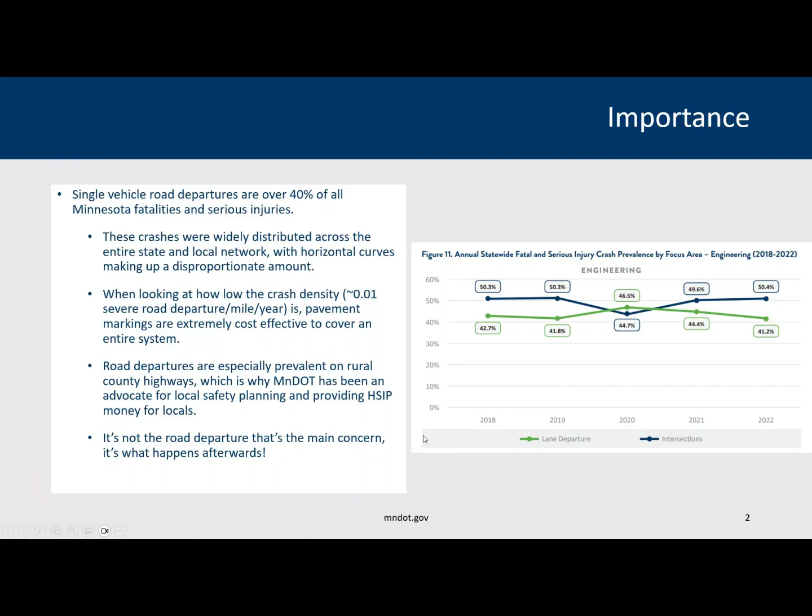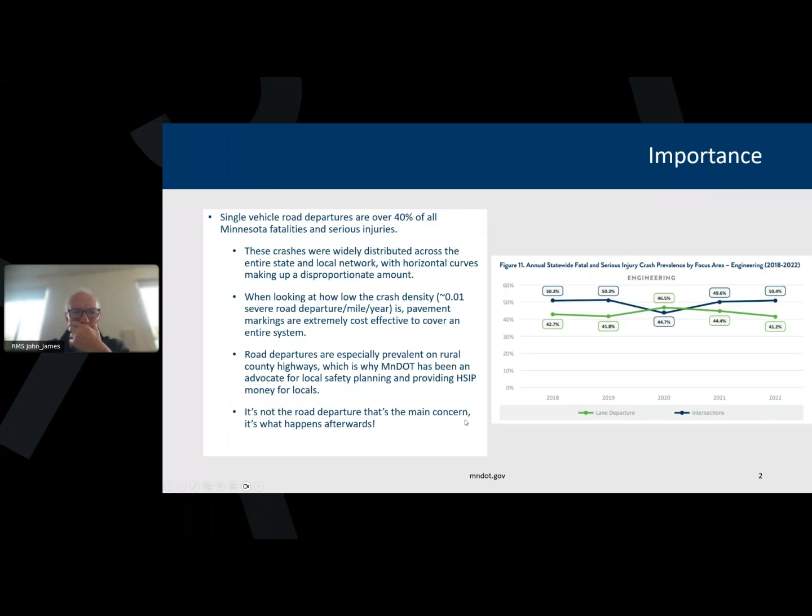And roadway departures are particularly prevalent on rural county highways, as most of us probably know. And it's really not the road departure that we're worried about, right? It's what happens afterwards that can be devastating. Okay, when are pavement markings needed, right? This is kind of starting out at the simple side of things. I think we all know this.

Centerline markings shall be placed, according to the MUTCD, on all paved urban arterials and collectors that have a traveled way of 20 feet or more in width and an average daily traffic of 6,000 or greater, and two-way streets or highways that have three or more lanes for moving motor vehicle traffic. Edgeline markings shall be placed on paved streets or highways with the following characteristics: freeways, expressways, rural arterials with 20 feet or more and ADT greater.

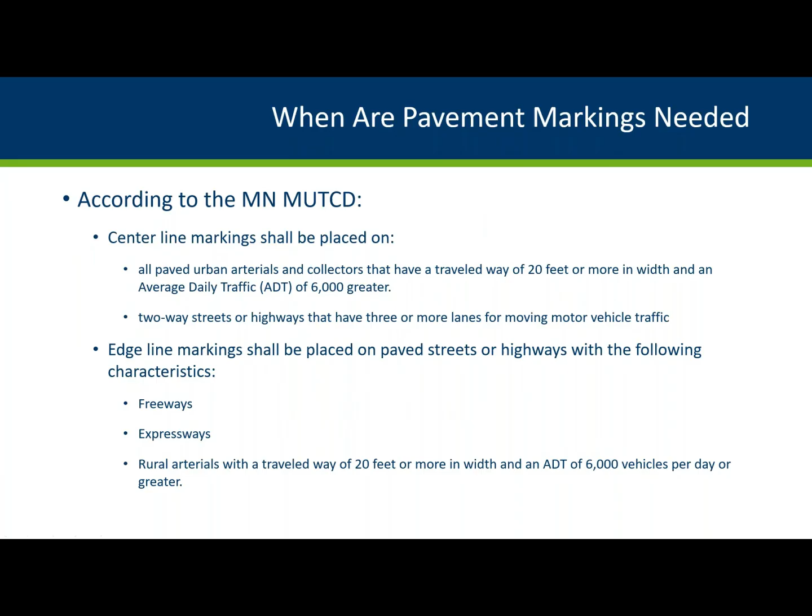Really just saying that because due to safety benefits, MnDOT actually has chosen to install center lines and edge lines on all of our paved roadways. Granted, we probably have higher ADTs than a good chunk of our state, counties, and cities, but this is our decision that we've made. And in our MnDOT provisions for pavement marking operations tech memo, we do state that we want to provide an appropriate pavement marking on all highways 365 days of the year. And an appropriate pavement marking is one that meets or exceeds the standards defined in the MN MUTCD. We do make our own MUTCD, just a caveat there.

And then obviously winter, right? During winter weather events, pavement markings should provide presence after pavement is clear of snow and ice. So just kind of giving that caveat because we do have to clear that quite a bit. I'll just gloss over this.

Research shows, like in that tech memo, we kind of talk about how we fell on our minimum retros, and looking through that and the research there, MnDOT's adopted a minimum performance of 100 millicandela per meter squared per lux for both white and yellow, minimum in service. And as markings approach this threshold, they have to be replaced. And one of the tools that we use that we verified to kind of figure out when we look at these markings is coming up. And minimum initials have been set to get the desired longevity.

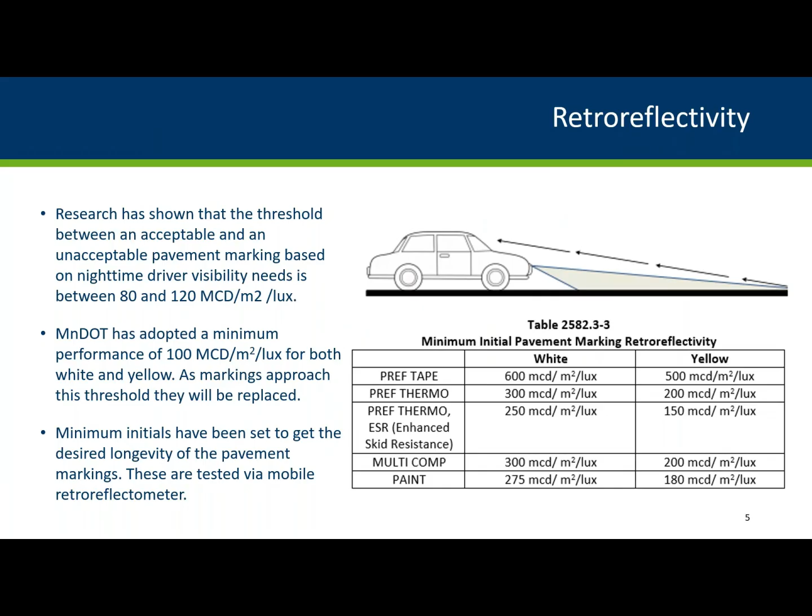That kind of leads into this next slide: how long do we anticipate these things to last? If you look at this chart, obviously surface applied markings last less time than recess markings, which is why we're really pushing for recess markings. We've verified that we're seeing multi-component liquids, or primarily slow dry epoxy, and in recesses we're seeing 5 to 7 years pretty regularly, which is great.

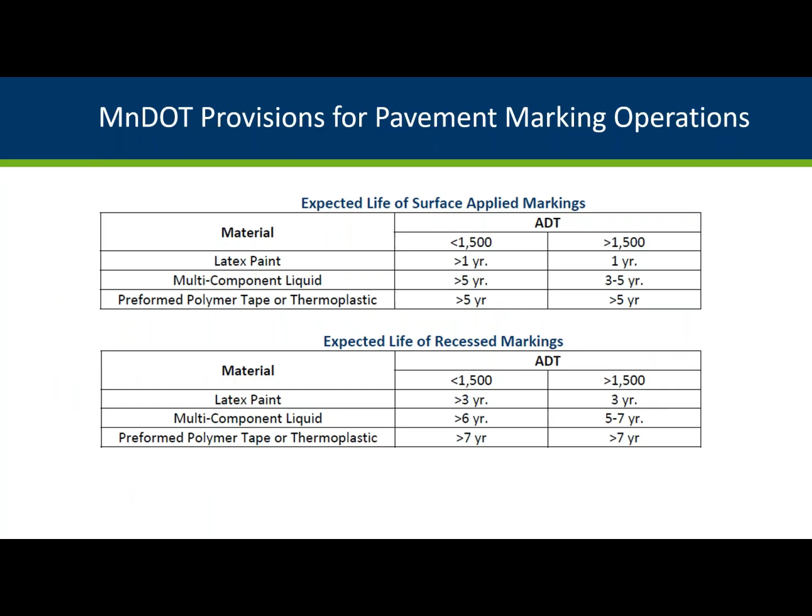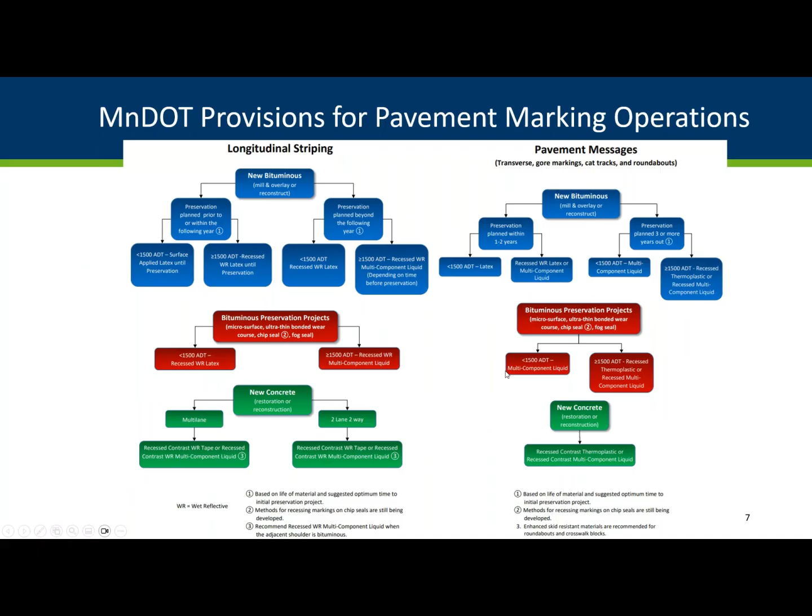This is a flow chart from that same tech memo. You can look at this further when it gets sent out, or through the recording, or screen capture it now. It's also in the provisions for pavement marking operations tech memo. As you can see, we're calling out a lot of recessed and wet reflective markings, and we'll get to why that is further along.

Recess markings, right? You can see this is a picture in my background - it's a beautiful picture in my opinion. A vast majority of new surface and preventative maintenance projects are calling for recess marking on MnDOT roadways. The reason is a significant increase in longevity due to wear, as you can see in that expected chart, giving quite a bit more lifespan.

And it reduces installation time. One of the big things too is that the less you have to install it, we're reducing installer exposure to traffic, which is a huge benefit. For life cycle cost, sometimes it looks equal when comparing costs now versus more frequent yearly latex applications. We're very conservative when we look at these prices, and in the long run, comparing a now cost versus a later cost, we're definitely cheaper on the life cycle costs.

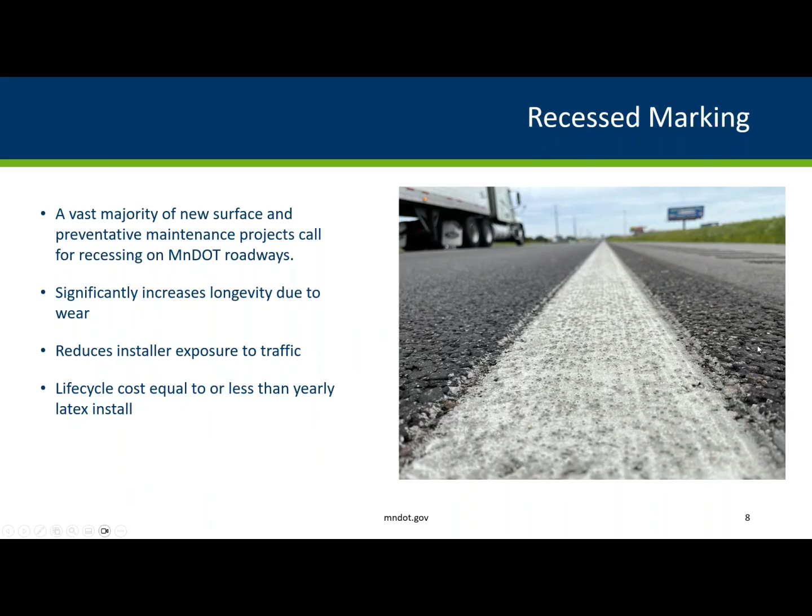One of the other things you may have noticed is that we're pushing enhanced skid resistance markings. It's a concern for vulnerable road users like motorcyclists, bicyclists, and pedestrians - we want to make sure these roadways are also safe for them. This is for messages mostly, and the enhanced skid resistant option with added aggregate is recommended for any situation where deceleration, turning movements, or pedestrian and bicycle traffic is occurring.

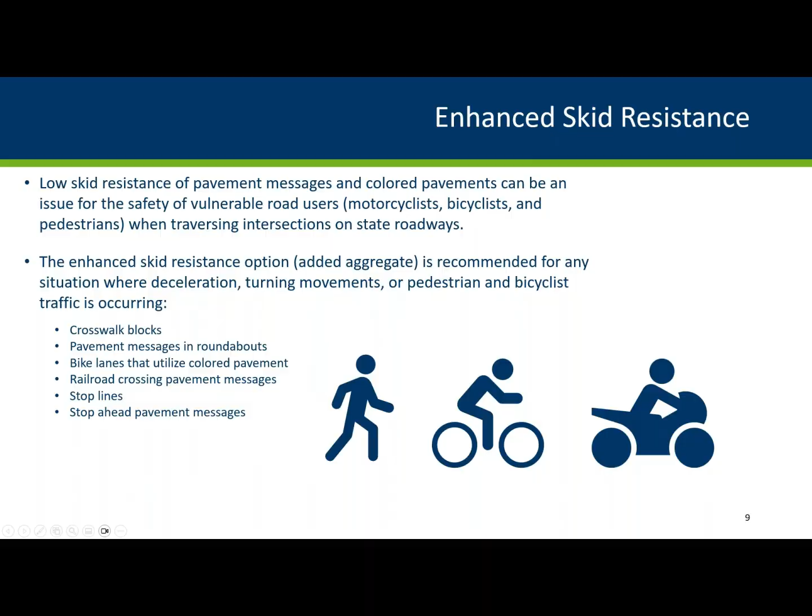Jumping into the wet reflective side of things that I noted earlier, we got to this pavement markings wet retroreflective standards research study. The reason is that we're recessing all our markings, and now when we see severe downpours or rain in general, we've created troughs that fill up, and we can't really see the markings that well. So what do we need for wet retroreflectivity? This is a situation we've created through the recess, but we wanted to solve through this research study.

We had been calling out wet reflective markings, whether recoverable or wet continuous elements, but this study was really drilling down into what the minimum needed to be. So laying out what this did: we did wet continuous condition testing, where participants counted skip markings visible in the 3M rain tunnel from a stationary position, two sets of markings at a time. You'll see some pictures that make this clearer as we go forward.

A previous picture was one as well, but we'll get there again. They'd count these skips, and that would be turned into an observation distance to make sure we got an appropriate observation distance through all this. Then we got subjective ratings of the marking adequacy from each participant.

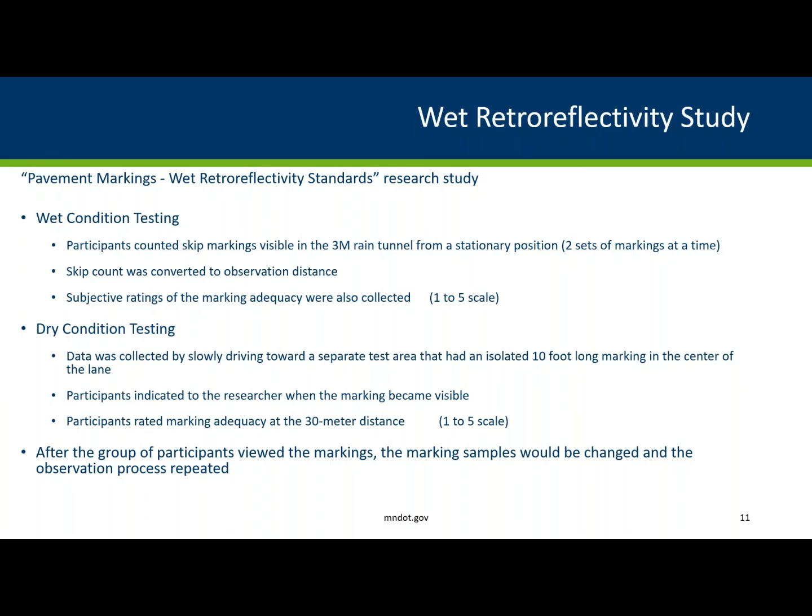We also did some dry condition testing, where as they drove through the tunnel they approached a 10-foot long marking. Participants would indicate when that marking became visible, and then rated that adequacy 1 through 5. After the group of participants viewed the markings, the marking samples would be changed, and they'd go through another round of this.

So the data overview—this is a really good picture comparing a couple of markings that were out in the rain tunnel as the water was going. There were 1,209 human factor observations: 403 dry, 162 at rain rate 1, with a higher and lower rainfall, the higher being 2.5 inches per hour and the lower 1.5 inches per hour. Those are still pretty high rain rates, especially knowing that ASTM 2832 for continuous wetting is 2 inches per hour—that's pretty significant. These two markings were simultaneously observed each trip. 20 marking samples were evaluated, 11 white and 9 yellow, and here are the retroreflectivity ranges.

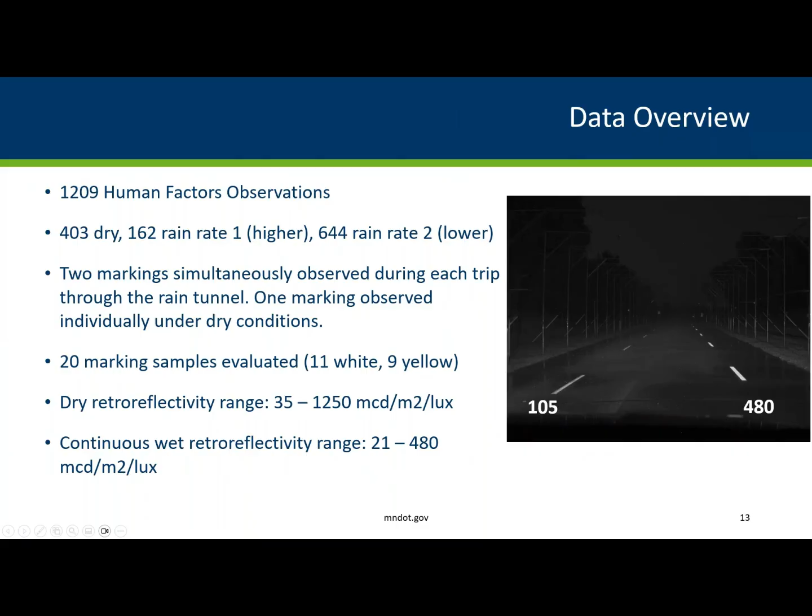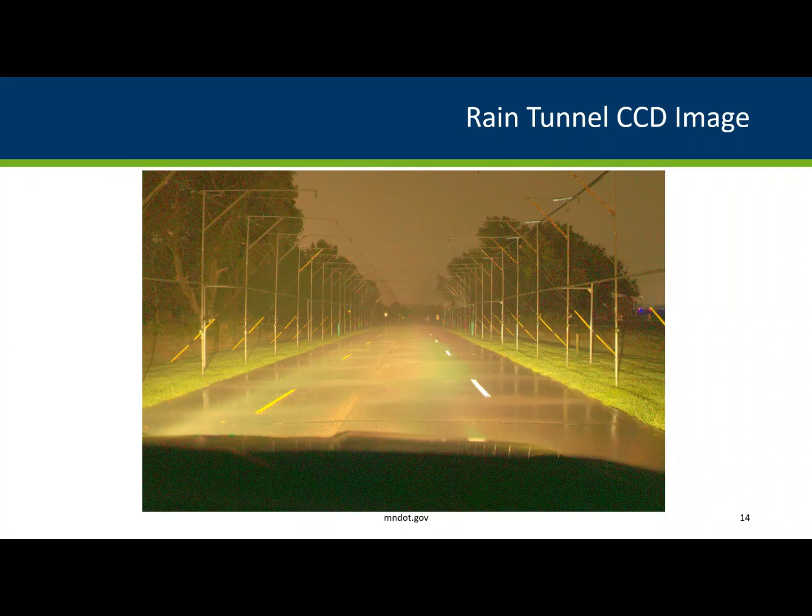Just another picture from the CCD image, which was taken with a ProMetric I29 imaging colorimeter, giving you a picture of what it looked like out there. And then just the dry marking as they approached it—this is what that marking would look like.

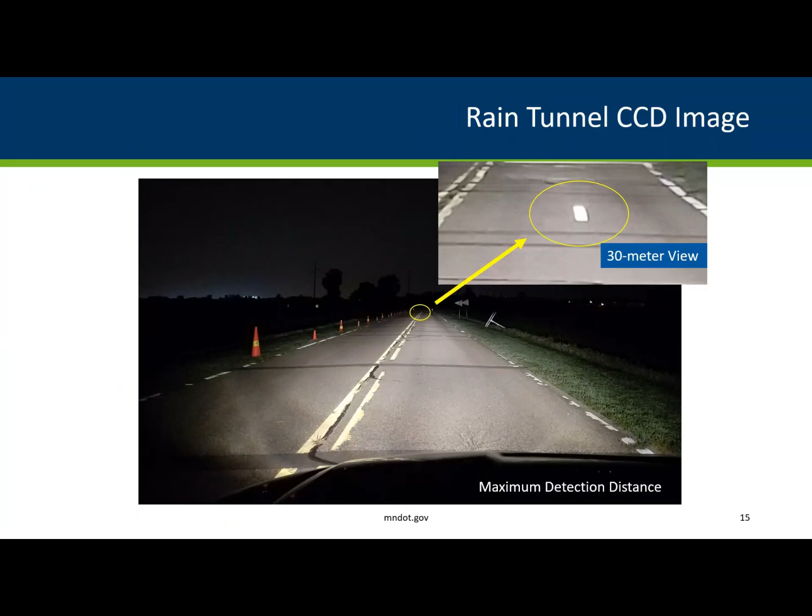So skipping to the end, what we found was that 50 millicandela per meter squared per lux wet continuous retroreflectivity was found to be the minimum to make an emergency maneuver at 55. So this is the bare minimum we wanted installed for wet retro. Looking through some numbers out there, there weren't a lot of numbers when this was done as far as degradation of wet elements really went. We had some, but from that we estimated that about 200 was the suggested initial install.

We're still working through that. I would say we're definitely going to be modifying where the yellow falls, just because yellow wet continuous values are pretty tough to get. We'll see where we end up, but it's definitely going to be less than that 200. We also have a special provision requiring initial testing on all our wet reflective markings out there, which can be done through our mobile retroreflectometer contractors in the state using ASTM 2832 or an approved equivalent—there is one approved equivalent they can run mobily.

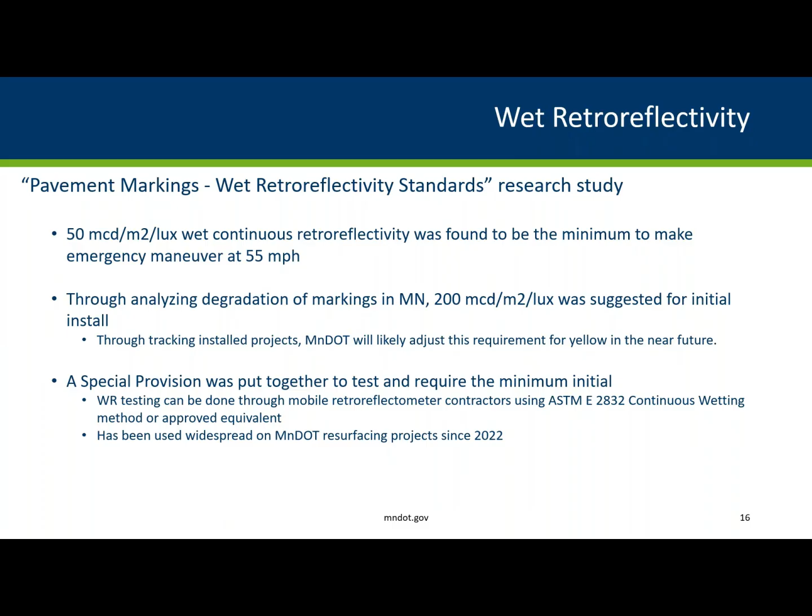This has been used widespread on MnDOT resurfacing projects since 2022. So we're getting some data, and we're also tracking the degradation as we go here too. We haven't reached the end of that, so that's good. Since 2022, we're still going—we still haven't reached that initial minimum, especially on our epoxy installs. So that's good to highlight.

And some other research studies here, just looking at some general safety indicators. There's a study, Safety Evaluation of Wet Reflective Pavement Markers, which looked at freeway sections in Minnesota, North Carolina, and Wisconsin, treated two-lane rural road locations in Minnesota, and treated multi-lane road sections in Wisconsin. As you can see, there were some pretty positive CMFs on freeways for all injury crash types—0.88, about a 12% crash reduction—and on freeways for wet night crashes, about 14%.

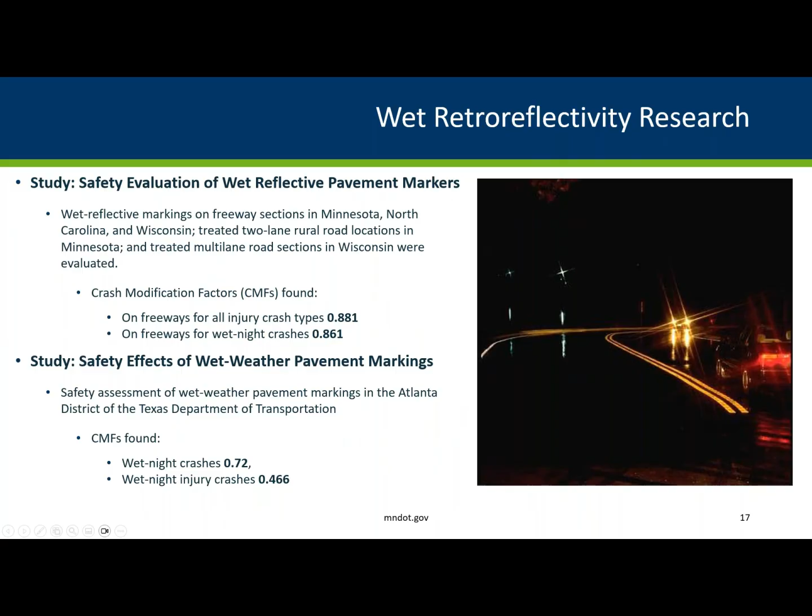There was another one, Safety Effects of Wet Weather Pavement Markings—a safety assessment of wet weather pavement markings in the Atlanta district of the Texas Department of Transportation. They had some pretty impressive findings there, with wet night crashes having a CMF of 0.72 and wet night injury crashes a CMF of 0.466. That is astounding. I wouldn't expect you to get that everywhere, but it's very impressive that they got that.

And this is just kind of a visual—a video from one of our 3M reps who is retired, but it's a great video to see the difference between it all. As you can see, this is all wet reflective markings, and then boom, non-wet reflective markings. So it's a very drastic difference visually, and it's always good to have that real world video to highlight how drastic the difference is.

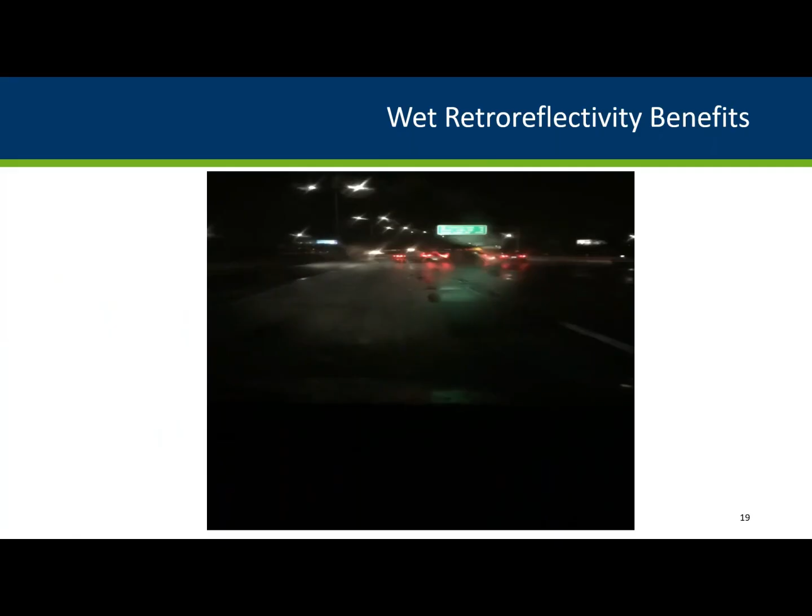Moving on, wider markings is another big issue, big topic that we've been pressing, and I'll go through what we've used to get wider markings here. There are a decent amount of safety cases for the 6-inch edge lines, and I believe Paul Carlson covered some of this, but I wanted to highlight all of these very impressive safety studies that went into driving the 6-inch edge lines for us.

Looking at the safety effects of wider edge lines on rural two-lane highways, highlighting what they looked at: there were 1,178 miles of 4-inch to 6-inch edge lines in Kansas, Michigan, which switched close to all their state roadways to 6-inch in 2004. Illinois had 1,446 miles of 4-inch to 5-inch edge lines.

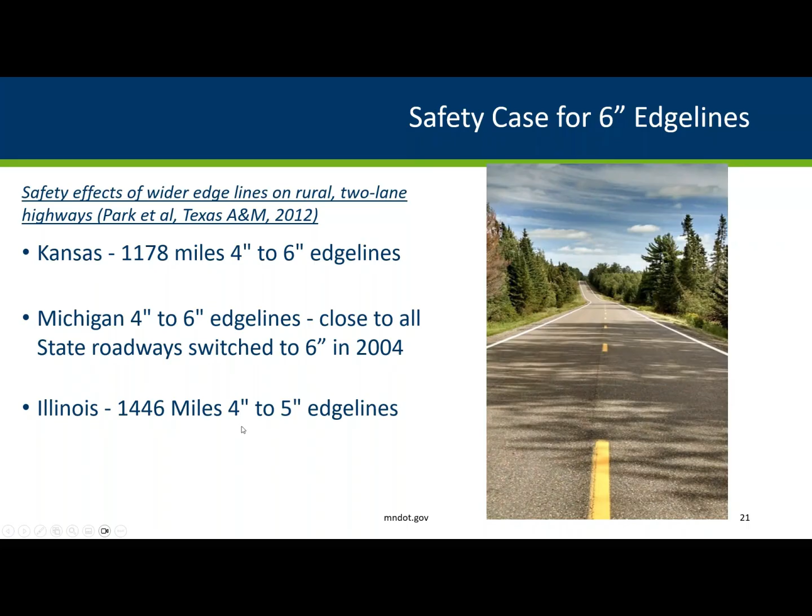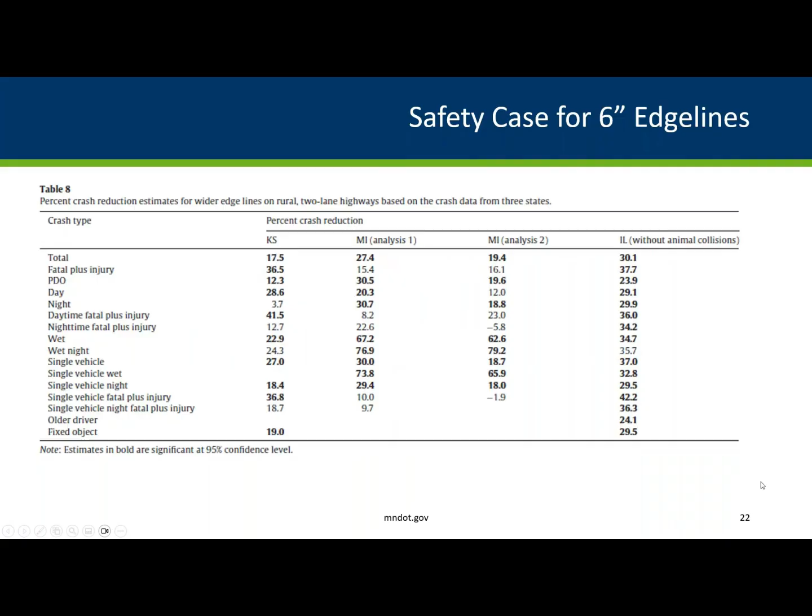And what did they find? They found pretty impressive crash reductions here as well. You can look through this, but I'll highlight some CMFs as we go forward. Benefit to cost is another big thing, as you can see in this last slide. There are very good crash reductions here.

This is another big study we looked at on the CMF website, the benefit to cost evaluation of Missouri DOT's total striping and delineation program phase 2. They had 2,300 miles of 6-inch all markings on their roadways, going from the 4-inch to the 6-inch, and then just looked at the benefit to cost they were getting.

Without resurfacing, on urban multi-lane divided highways they were seeing a benefit to cost of 29 to 1, and without resurfacing on rural freeways, 24 to 1. These are amazing benefit to costs - you rarely see these high numbers, which just highlights how big of an impact you can make with these wider pavement markings.

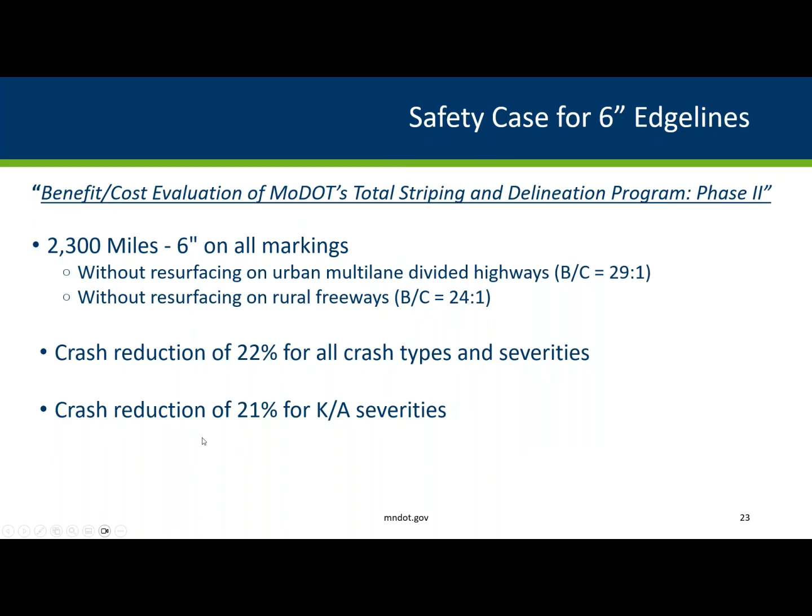Crash reduction at 22% for all crash types and severities, and 21% for K&A severities - also very impressive numbers. Another one: safety impacts of using wider pavement markings on two-lane rural highways in Idaho. A smaller sample set of 175, but still seeing an impressive benefit to cost of 25 to 1 and K to A nighttime crash reduction of 39%.

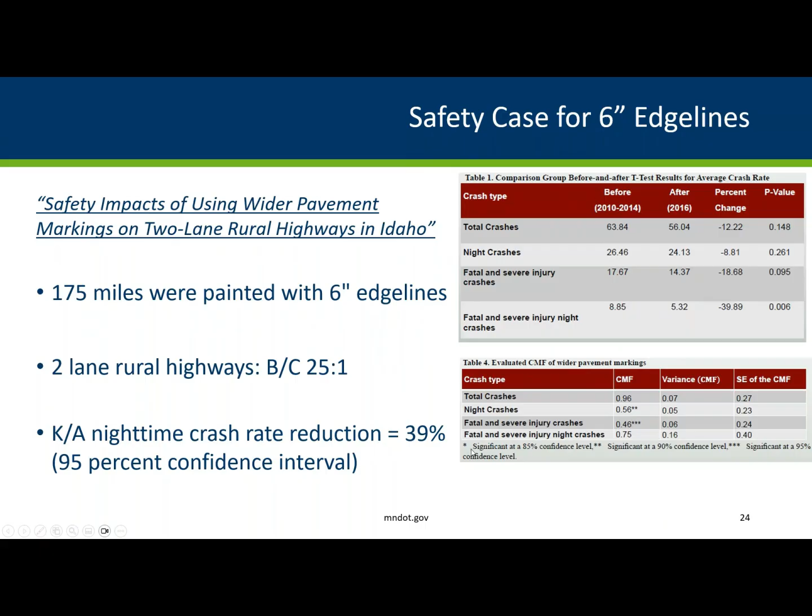You can take a peek at that, and then also obviously there's CAV support here. A quote I like to put in here from Andy Whydell: automated system cameras are akin to highly attentive nearsighted drivers. So anything we can do to help out a nearsighted driver is a great thing for connected autonomous vehicles. The thing is, cameras largely mimic human vision, so improvements for human vision are also usually improvements for machine vision as well.

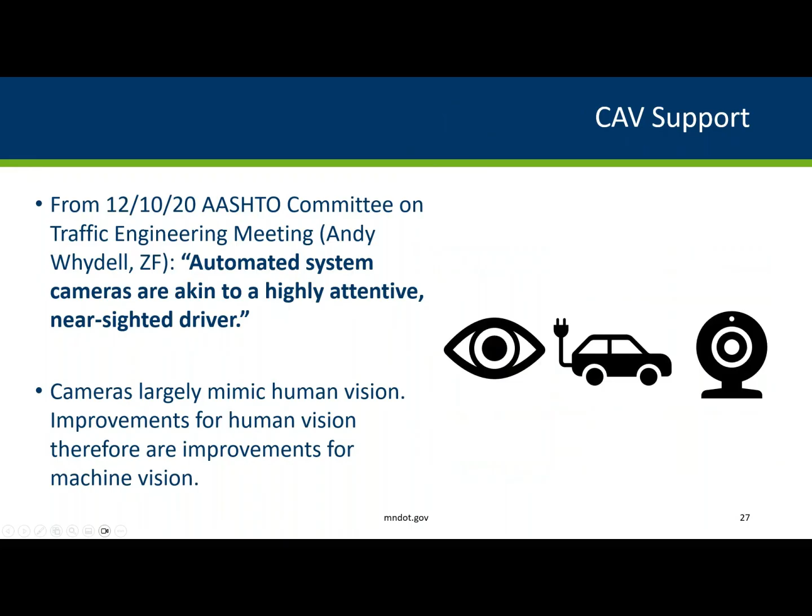Highlighting some Minnesota-specific studies for marking width and line cycles that we've gotten through recently, and showing how we're moving forward and doing what we can to evaluate what we're doing. One of the big studies that came up recently and just got finished was a pavement marking patterns and widths human factor study.

We took a look at a chunk of Minnesota 336 and I-94 in the Fargo-Moorhead area, and evaluated changes in the broken lane line markings. There was a project coming up that was going to resurface that same season, so we could do some temporary markings, get some things out, and evaluate it through a human factor study. We did a 4-inch versus 6-inch width study on these things.

One of the big things we really wanted to focus on was what broken line cycle should we have for lane lines. Looking into this, surprisingly little scientific research went into where we ended up with the 10-30. I think it just started out as a 1-to-1 cycle when it first came in, and then cost saving measures ended up coming back and we got to the 10-30, and we're like, looks good.

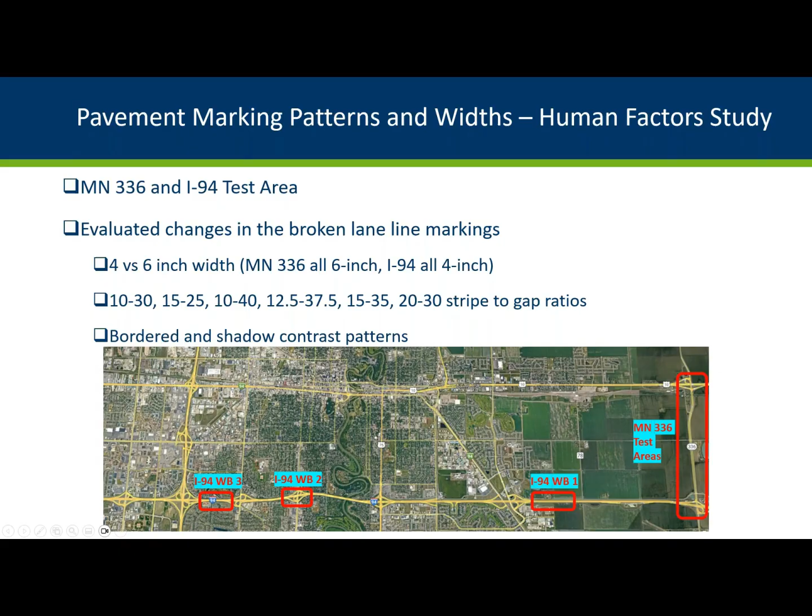So we also looked at bordered and shadow contrast patterns to see what was preferred there.

Going through it, our study approach laid out very quickly. We have participants drive a TTI test vehicle through test areas, and they would rate marking visibility and preference toward the marking designs at both day and night evaluations.

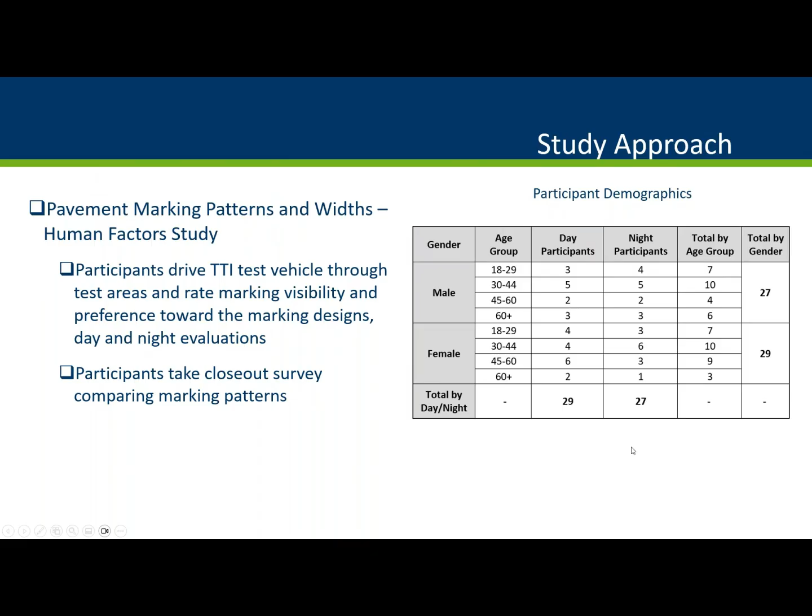Here you can kind of see the participant demographics, 27 male, 29 female. We managed to get that pretty even, and even the day and night participants were pretty even. You can see even the age groups seem pretty well distributed there. And then at the end, participants would take a closeout survey comparing marking patterns.

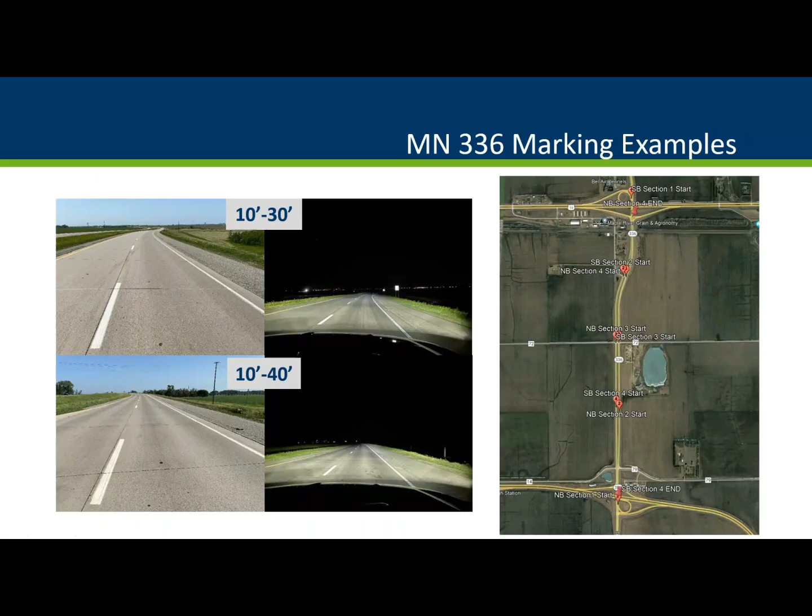I don't know if you've caught on, I probably said the MUT a few times. Here in Minnesota, we refer to the MUTCD as the MUT. I don't think that's a very widespread thing, but just kind of an interesting thing that I'll throw in there.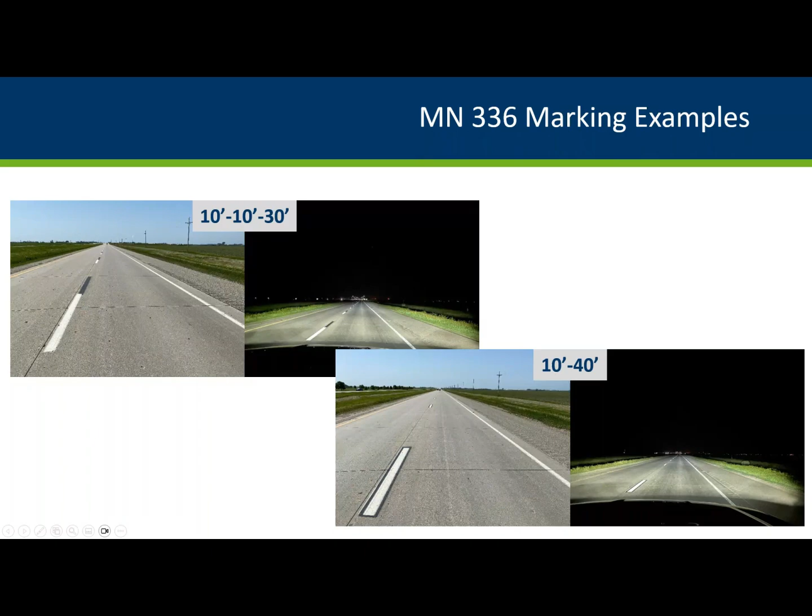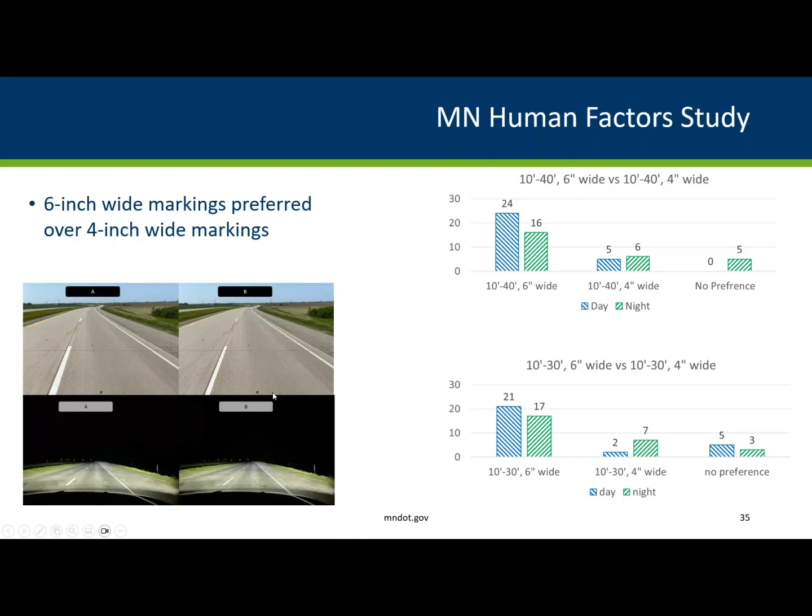So the human factors study, just some of the quick findings, and then we'll review the overall findings. One of the big things here, we were talking about wider markings earlier. 6-inch wide markings were definitely preferred over 4-inch wide markings for these broken line cycles. So that's a big thing to take away from this.

Going through this, in-vehicle visibility ratings resulted in all test sections being rated higher during the day than at night. I guess that makes sense.

The 12.5, 37.5, 20-30, and 15-25 configurations were rated the highest during the day and at night for both visibility and preference. The 10-40 section was rated as one of the least visible and lowest preferred sections.

Yeah, and we wanted to verify that, obviously. And then there was actually a restripe section mid-study. The interesting thing here is the restripe section had daytime and nighttime visibility and preference increase of about 1 after being restriped, and this increase was larger than the differences between most of the marking configurations. That just goes to show that restriping and maintaining a strong pavement marking is one of the most important things that you can do for drivers.

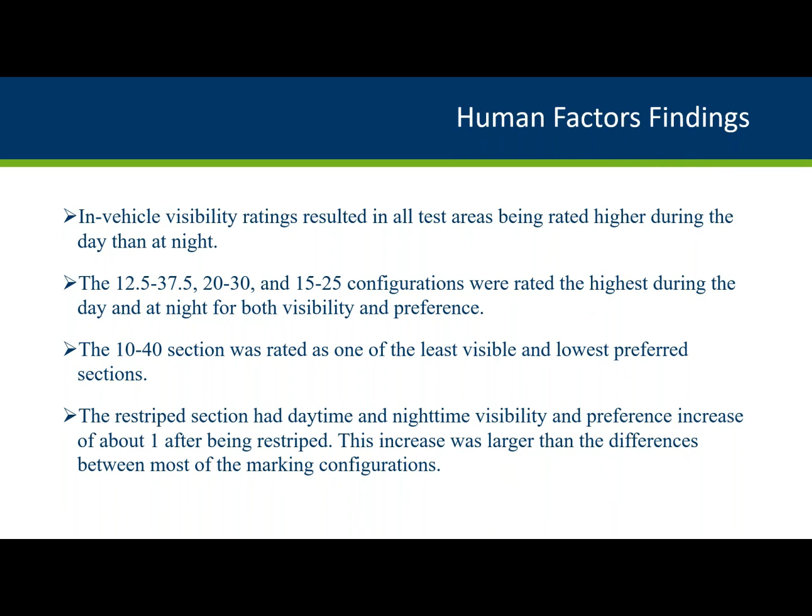Here, just a quick overview of findings. Closeout surveys indicate 6-inch markings are preferred over 4-inch. Closeouts also indicated that participants favored the 40-foot cycle at night, but not as much during the day. And at the 50-foot cycle length, longer skips were preferred, which we anticipated.

But actually, the 12.5 skip line was rated equally to the 15-foot skip line, but not as high as the 20-foot skip line. So there's that. I guess that makes sense.

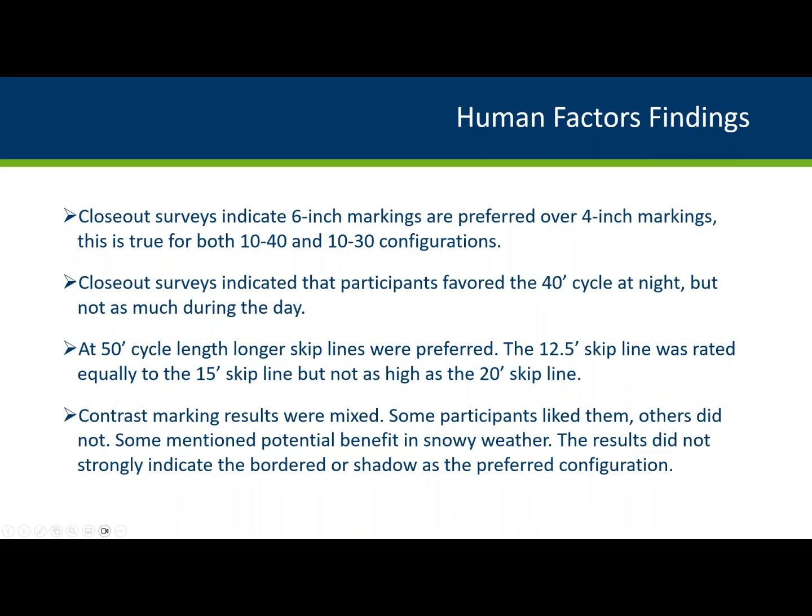Contrast marking results were mixed. This is kind of an interesting thing, some participants liked them, others didn't. Some mentioned potential benefit in snowy weather. The results didn't strongly indicate the bordered or the shadow is preferred for the human factors finding. I think what we found here is just that people don't actively process pavement markings a lot, so when you ask them about contrast, they don't really realize that they've seen it until they're seeing it. Interesting takeaway, but it definitely doesn't mean that contrast isn't a benefit.

So the recommendations from the human factors study changed from the 10-foot broken lane line pattern to the 12.5, 37.5 pattern. This maintains that 50-foot cycle that we really like, and it was preferred by drivers and improves machine vision detection, as you'll see in this next study I'm going to talk about. It also meets the MUTCD 1:3 ratio, using 6-inch wide markings, which is good. So it was preferred by drivers, especially on the broken line cycle, and we're looking at implementing that as an increase in safety, as suggested by MUTCD, as an upgrade for AV operations.

That's true, we've seen that a lot. The recommendation is if cost is a concern, start with edge lines and yellow markings that are warranted, markings on higher speed roadways, and edge lines on 2-lane, two-way highway roadways. So I think we're taking this into consideration. We're absolutely doing 6-inch edge lines, and we're starting to adopt those 6-inch broken lane lines. We're actually looking internally to see if we can identify safety benefits for center lines on undivided roadways, because some districts have moved to that fully, while other districts still use 4-inch center lines and think that's adequate, particularly in no-passing zones with two 4-inch markings. There's a school of thought that thinks that's enough, so we'll see how that goes as we look internally at safety.

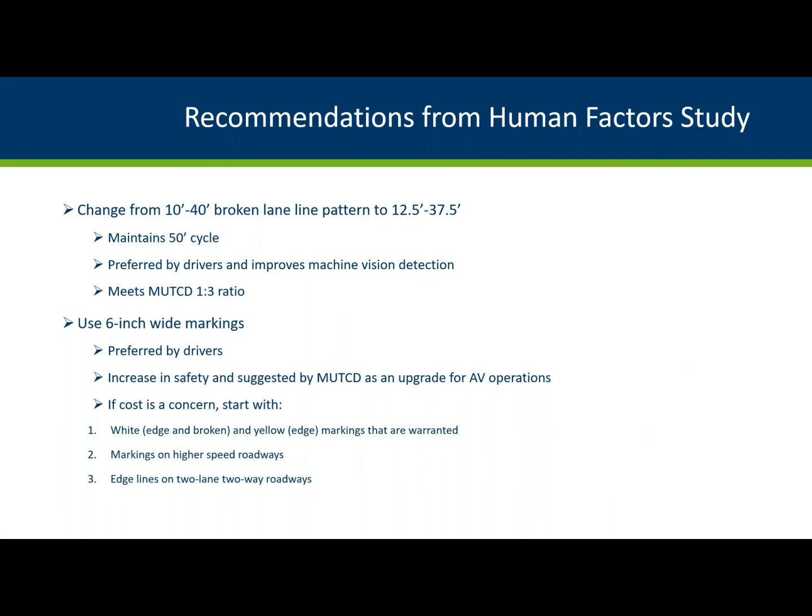They utilized different systems to evaluate tracking for different marking configurations. TTI had a camera system you could take in and post-process data. There was a Mobileye 8 setup they got right before this study, which let them look at a lot of quantitative data for all the test areas. There was also a Ford Copilot 350 assist system, Tesla Autopilot, and Toyota Safety Sense, all tested just in Minneapolis. The drive tests were along the Minnesota 336/I-94 section in Minneapolis, and also in Texas, collecting data to determine how the cameras observed these markings.

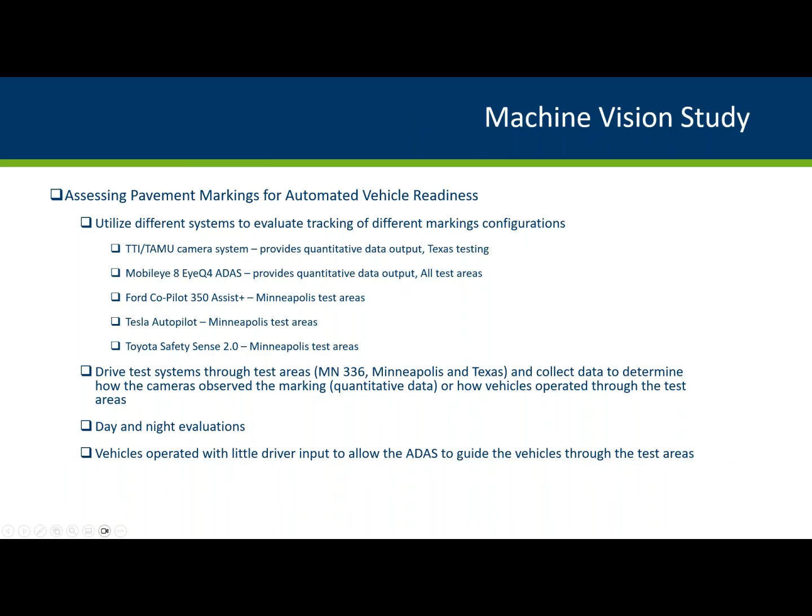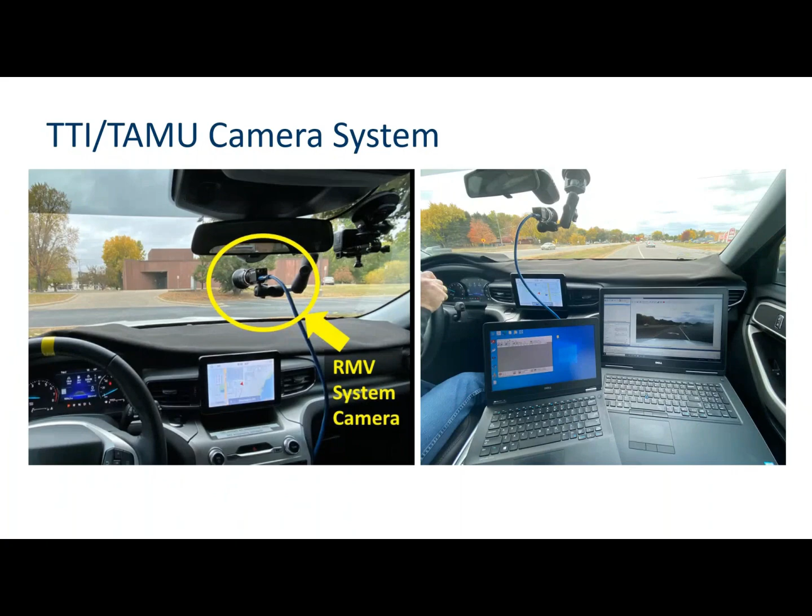So the Minneapolis ADAS vehicle operation results: observations did not find any evidence, which was surprising, that lane line configuration, skip-to-gap ratio, line width, or contrast pattern affected the results. The bigger issue was that in areas with lower quality markings, there was some loss of tracking. So again, maintaining pavement markings is a huge issue. The other thing they saw was that areas with turn bays or ramps had the biggest issues.

Areas without dotted edge line extensions often caused lane drift into these areas, and areas with roadway curvature had more issues than tangent areas. When dotted line extensions were present, the amount of undesirable movements was reduced, and proper delineation at gore areas should keep vehicles out of them. Chevrons may be advisable at long gores where incursions are more frequent, those areas that really end up looking like lanes sometimes.

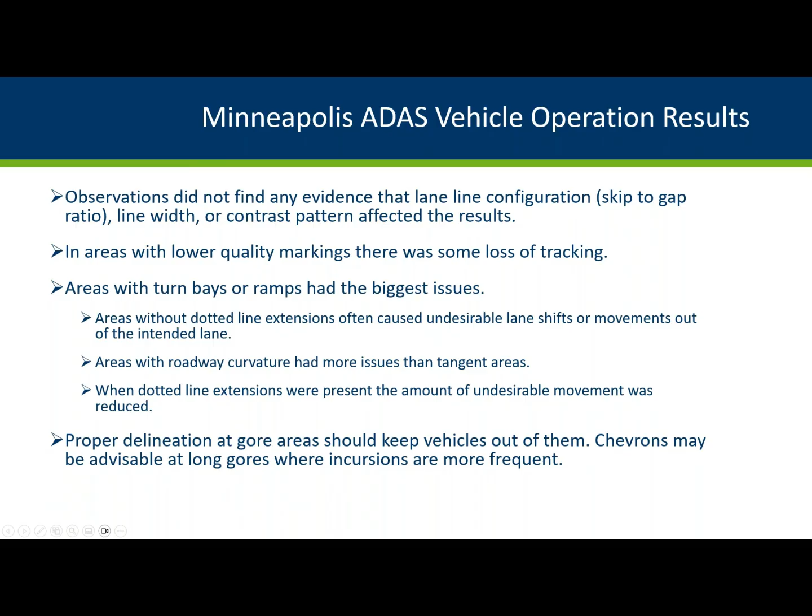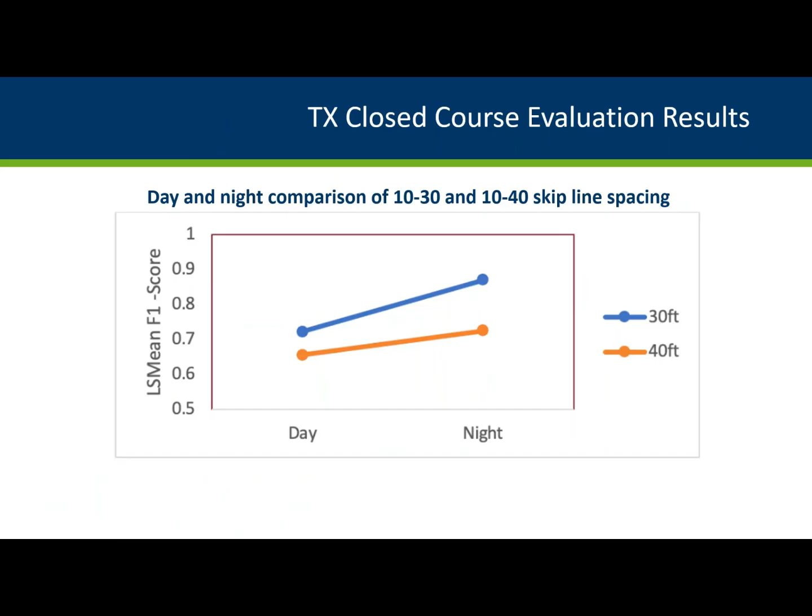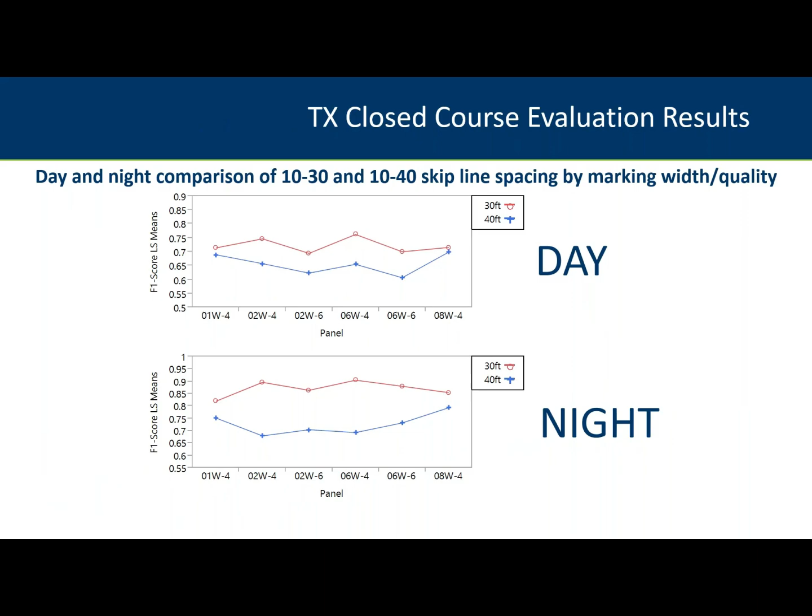So the higher the value, the more precise these systems were. So you look at the 1030, 1040, 1030 is definitely preferred here, right? And then just day and night comparisons here. 1030 definitely preferred.

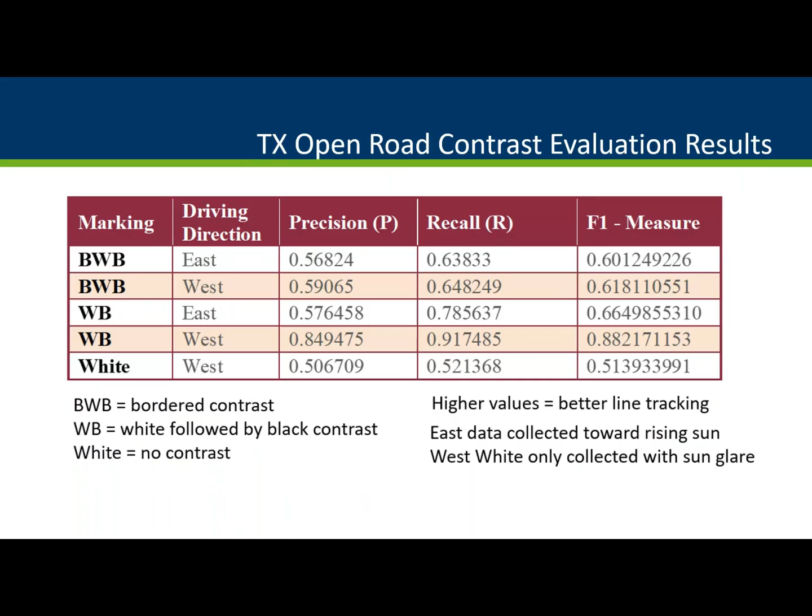And then also we're looking at the F1 scores here for the contrast. And as you look here, you'll see that the white followed by black contrast gets you the highest F1 ratings, which leads me to believe that that is preferred by CAVs. And this is just the long machine vision findings at the end of it.

And really, what you're getting from that lag contrast marking is a longer detection distance. So maybe not always a better detection when it's close, but it can definitely read it further out. Vehicle operation observations do not find any evidence that lane line configuration, skip to gap ratio, line width, or contrast pattern affected the results, but more so the quality of the markings impacted it. So again, we got to maintain these things better, right?

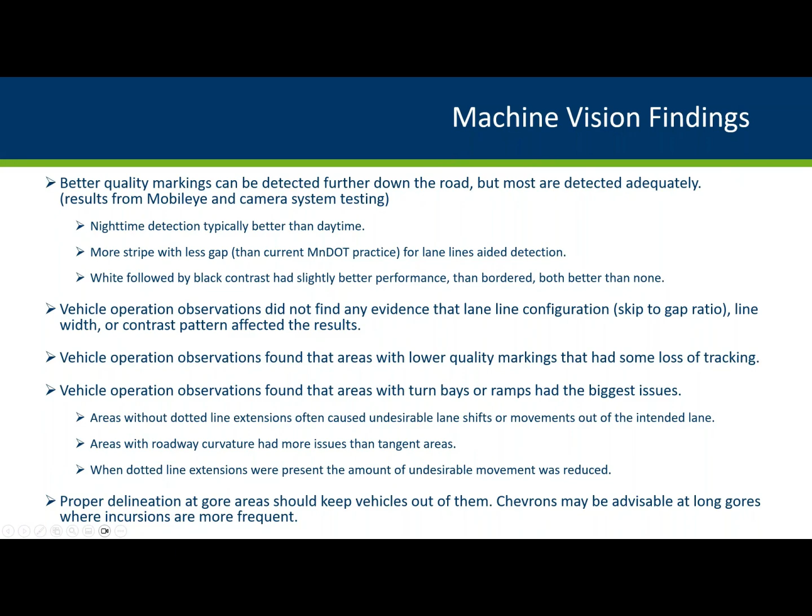Vehicle operation also found that areas with turn bays or ramps had the biggest issues. So areas without those dotted line extensions and areas with roadway curvature were more of an issue. And then when they actually had those lane line extensions, they saw better delineation with these. And then also, proper delineation at gore areas should keep vehicles out of them too. So just keeping that in mind when you have larger gore areas.

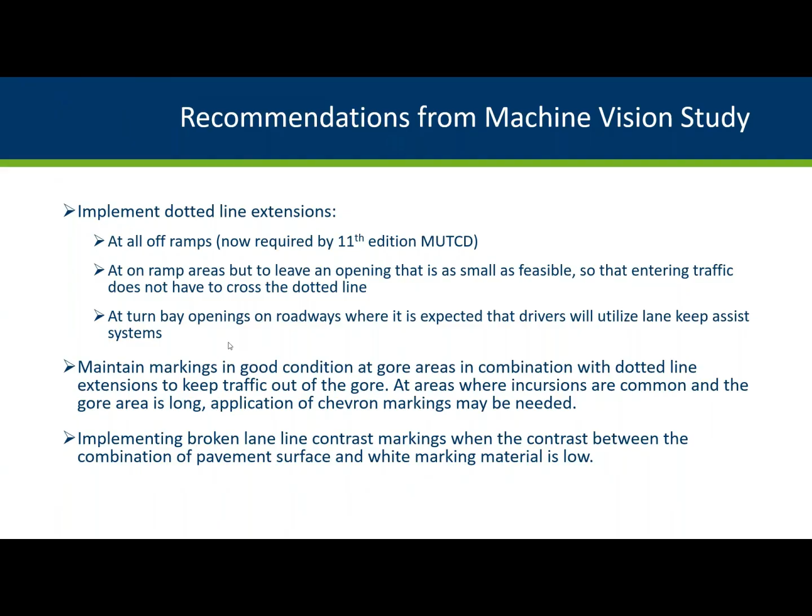So recommendations for this study, what does all this mean, right? They suggested implementing a dotted line extension at all off ramps, and then at on ramp areas, but leaving an opening that is as small as feasible so that entering traffic doesn't cross that dotted line and make them stay in the shoulder lane. At turn bay openings on roadways where it's expected the drivers will utilize lane keep assist systems as well. Maintain markings in good condition at gore areas in combination with dotted lane line extensions to keep traffic out of the gore area.

At areas where incursions are common and the gore area is long, application of chevrons would be needed and recommended. And implementing broken lane line contrast markings when contrast between the combination of pavement surface and white marking material is low. And we've already started moving toward the lag version of contrast, as we found was benefiting. And I think that's it.

I'm just going to page through some QR codes for things I brought up: the MnDOT provisions for pavement marking operations, the pavement marking decision tree tool that you can go through that I'd like to highlight here, the pavement marking patterns and widths human factors study website, the pavement marking wet reflective standards study website, and finally the assessing pavement markings for automated vehicle readiness study website.